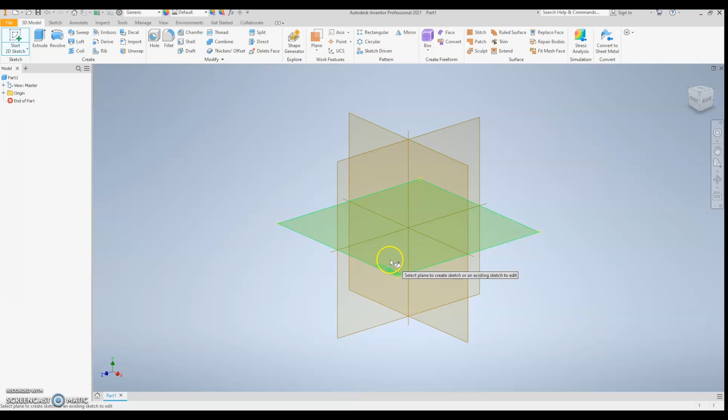Okay, now that we're in the New Part section of Inventor, we're going to go up to Start 2D Sketch or the green plus button. We're going to pick a plane to work on. It doesn't matter which one. Any one will do. I usually pick this one. Click on that.

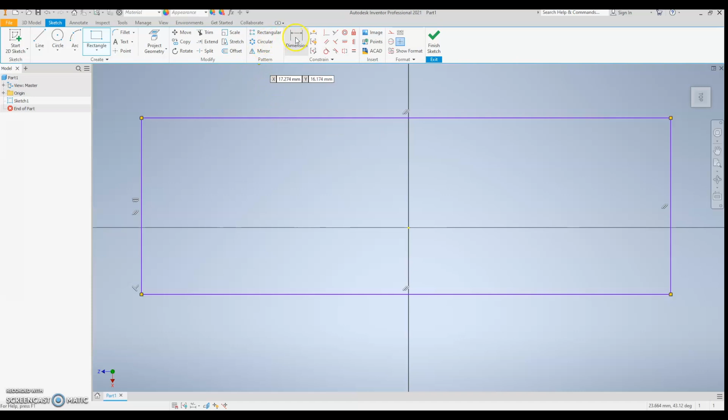Okay, now that we're in the design plane, we are going to start a sketch. So again, we're going to start a rectangle, and you just single click to place the top left corner, drag the rectangle out, and then single click to place the bottom right corner. We're going to adjust the dimensions to any size that you want for your box. So these are basically going to be the sidewalls that make up your box. For this demonstration, I'll make my sidewalls 300 millimeters long.

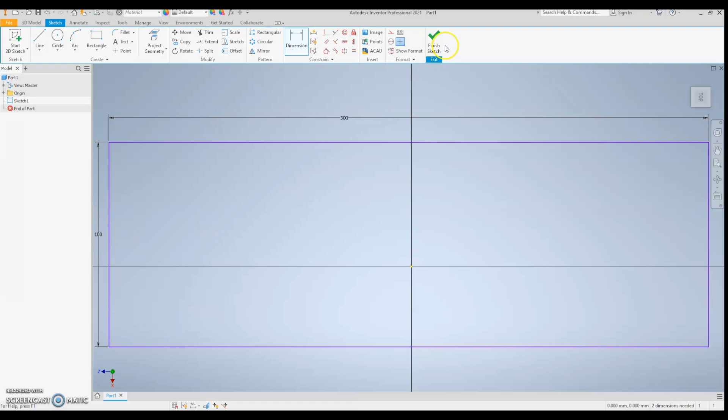If it looks like it's disappeared, you can use the zoom all function, which is the page with the magnifying glass, and you can zoom out to have everything visible. I'm going to make the height of my sides 100 millimeters. Depending on the kind of box you make, that will probably be an adequate size if you're looking for a jewelry box or a tackle box or something. Then we exit the sketch. That's where I just clicked up there, the green tick, and zoomed out again.

Now we're going to extrude this sketch. So I'm going to click on extrude, and we're going to change the distance to be 19 millimeters. If you're going to make your box out of pine, the standard width or thickness of pine is 19 mil.

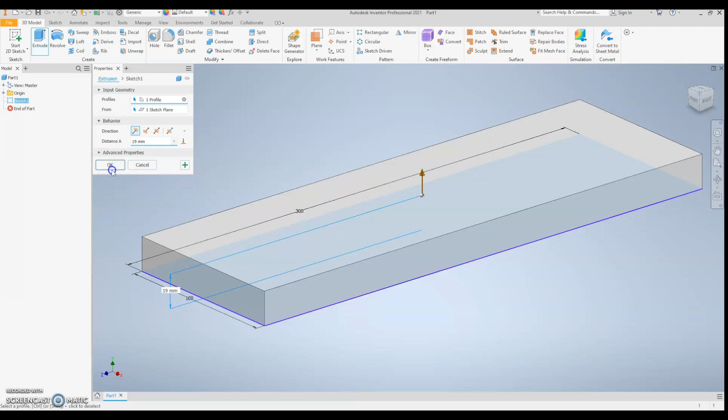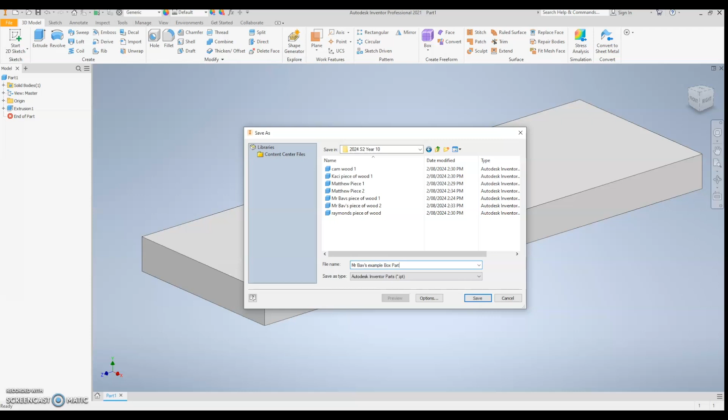Okay, now that that's done, I need to cut the housings in this piece. Actually, I'm going to do a clever thing. Well, it's sort of clever. I'm going to save it as is. I'm going to find my student share folder, because what I'm going to do is use this part as it is as the basis for both pieces. I'll show you what that means shortly. So I'm just going to save it now. This is my example box part 1 of 2, and I'm going to save it. And so now I'm going to open this up later and not have to make the sketch and stuff again.

Now I'm going to make a sketch on the top face. So click New Sketch, or Start 2D Sketch, and then click the face that you want that sketch to go on, which is this one. It'll turn green. There we go.